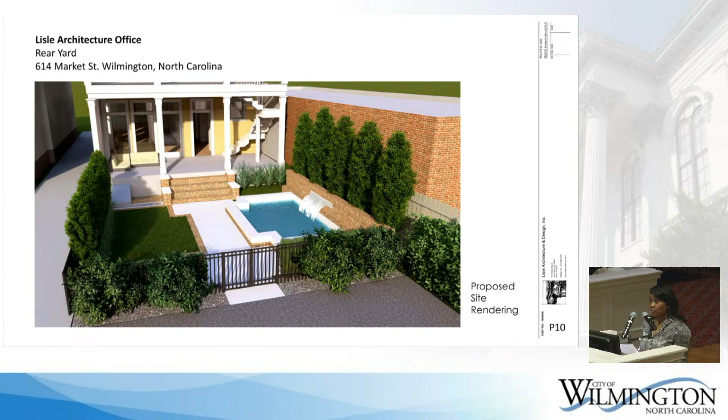The proposal seeks to remove the non-historic parking space from the backyard, add a water feature in its place, and improve the area with new landscaping, a paved walkway, and fencing. The renderings and the presentation represent the design guidelines and also the features in the materials.

The staff report recommends approval based on the following conditions: the waste concrete from the demolished parking lot should be removed from the property for proper disposal; the existing driveway should not be altered in size or material as a result of this project; no mature trees or historic landscaping shall be removed as a result of this project; and the proposed fence height should not exceed 6 feet.

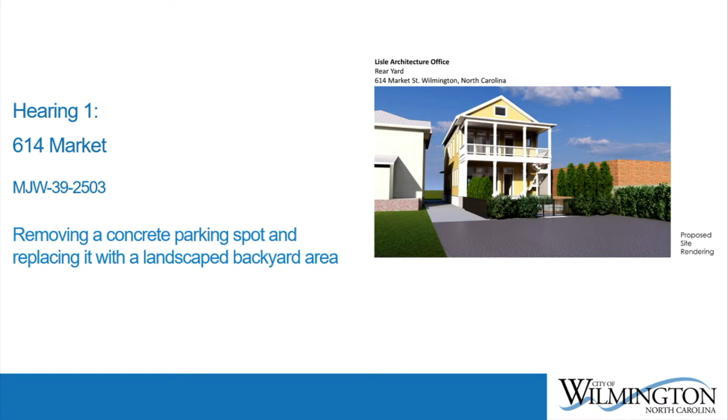Do you have any questions? Is this going to remain an architect's office? Is there any change? It's an architect's office right now. Is it still going to be an office for an architect, or is someone buying it? I'm just curious why they're doing this. I'll let the applicant speak to that. All right, thank you. Any other questions for staff? Thank you.

Could we please hear from the applicant if they're here and available?

Hi, my name is Griffin Lisle. I live at 225 Candlewood Drive. I'm just here to answer any questions you have about 614 Market.

Any questions? Is it going to remain an office? Yes. And is that a swimming pool in the backyard? Or is it a water feature? Water feature, yeah, okay. That's all. Okay, thank you. No problem.

If we can invite any members of the audience to come up and speak in favor or against this item. Have you been sworn in? Okay, come forward and we can do that here. I think you're going to face Ms. Bradshaw over there. Raise your right hand. Is the testimony you're about to give the truth, the whole truth, and nothing but the truth? Thank you.

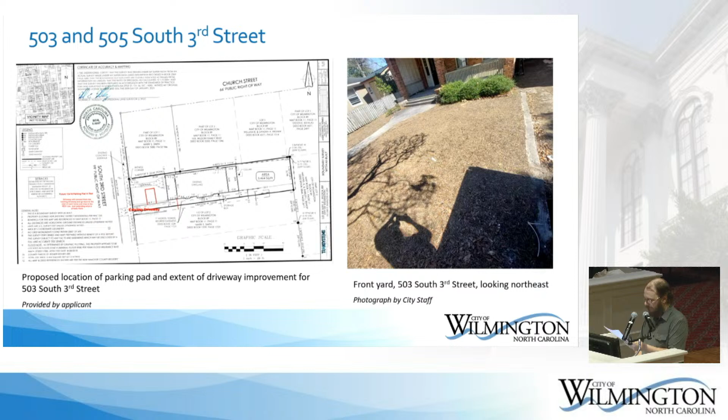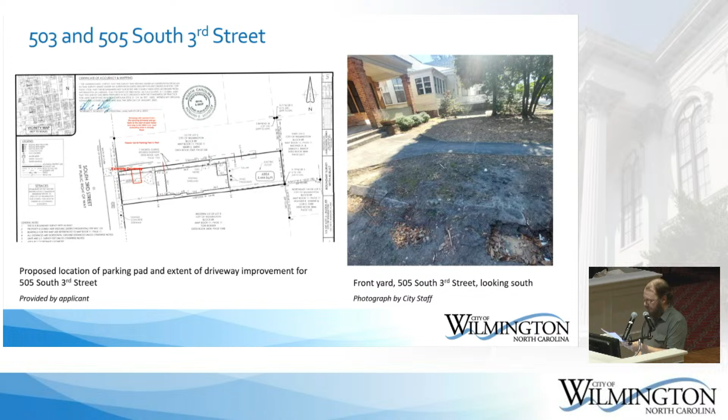The proposed concrete for both the improved driveways and parking pads will be standard concrete mixture and match the existing city sidewalk and concrete walkways already on the property. The existing concrete walkway for 505 South 3rd Street will be incorporated into the proposed parking pad for the property.

The existing driveway is lined by a low masonry curb retaining wall in a varying state of disrepair. While the existing driveway is sunken in comparison to the neighboring yards, the proposed concrete driveway improvement will raise the elevation of the driveway to match the yard, so no major property grading will be required.

The final portion of the proposed project is to repair the damaged brick at the rear of the house of 505 South 3rd Street. The damage, likely caused by subsidence, has resulted in a situation that requires the existing brick wall to be deconstructed and rebuilt.

The existing brick will be salvaged and reused as much as possible, and any required replacement brick will match the existing brick as closely as possible.

Although care will be taken to match the replacement brick and new mortar, the proposed repairs will be highly visible, so to remediate that, the applicant proposes to use a natural lime wash to cover and protect the reconstructed brick wall. A natural lime wash is recommended by the National Park Service for unpainted masonry because the lime wash allows the brick to properly breathe while protecting the brick and giving it a uniform appearance.

If approved, in addition to the standard conditions, staff recommends that the conditions include that the proposed driveway improvement project and parking pads shall be installed with a minimum amount of grading to minimize the alterations to the property's topography, with screening vegetation planned to obscure the view of the proposed parking pads from the public access. Screening vegetation shall be chosen from the city's suggested plant list or approved through the administrative bypass process. No mature trees or historic landscaping shall be removed as a result of the project, and only the brick portion of the rear on 505 South 3rd Street shall be lime washed.

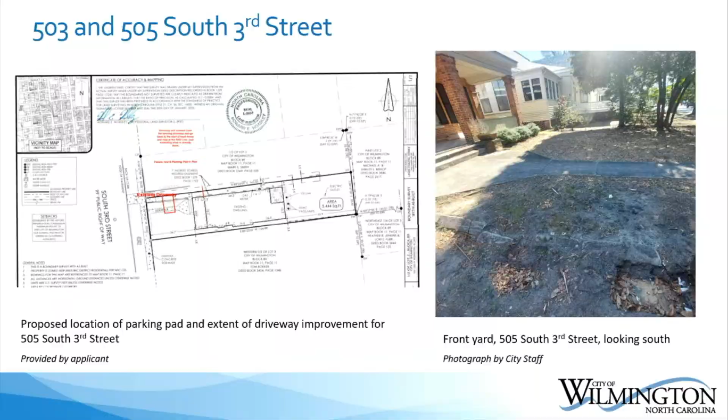The brick repairs will be needed because that back half unfortunately sunk many years ago at some point, which caused that huge crack in the rear. So in order to repair that property properly instead of covering it up, we have to take that section apart and build it back. It's very hard to match those bricks, so you're definitely going to see a difference there. It doesn't look like any of the brick themselves are actually cracked, everything cracked along the mortar joint.

So two-part question: one, could you not save the brick as you cut these out and pull them apart? But more importantly, have you had a structural engineer or someone identify what the issue is to make sure that when you go about doing the repair, it doesn't happen again? Something's happening down below.

Yeah, absolutely. So the other owner on the property, he's the general contractor. He brought his structural engineer in, and structurally the property's sound. It just sunk many, many years ago from when it was originally built.

So I'm arguing against the idea of coating this with anything, I don't think you need to. I think you'd be able to take this apart, stitch it back together, match the mortar, and then you won't have to coat it.

To be bluntly honest, the other part of it is the fact that they're identical twin properties, and we wanted to differentiate them from a selling perspective, because right now they are identical in colors and everything. So that process would differentiate them a little bit so they don't look absolutely identical.

I mean, you could probably be considered for another award if you go about doing this in a way that you gently take the thing apart, grind the joints out, remove the brick, put it all back together, put some wall ties in to bridge that joint where those cracks are, or tuck in some number 3 rebar, remortar with a matching color mortar, type N, and just put it all back together.

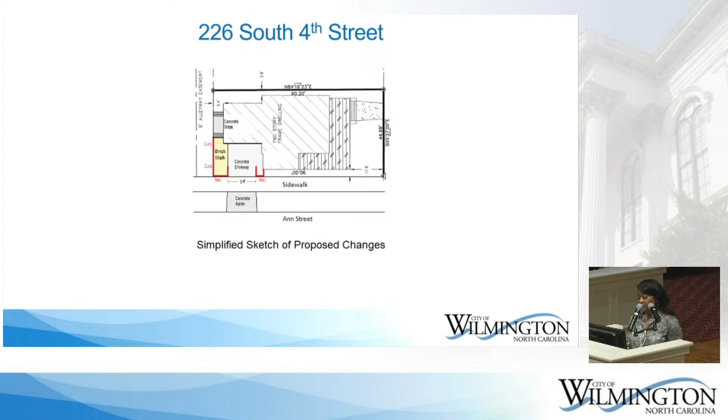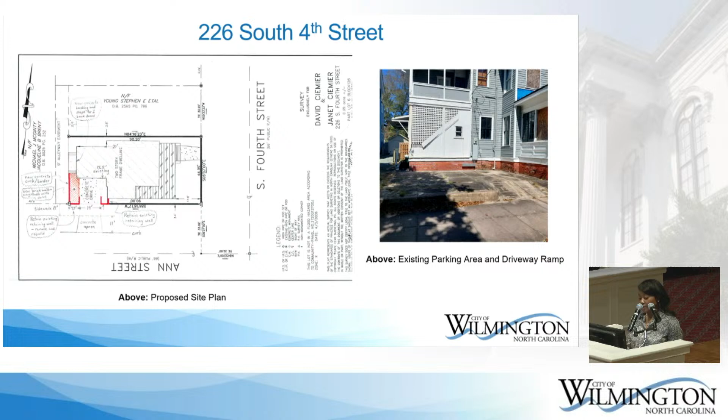The applicant proposes to demolish the existing deteriorated concrete slab driveway and replace it with an expanded driveway to improve its safety and usability; demolish and remove the existing concrete slab surface and construct a new brick walkway alongside the proposed improved driveway; and replace the existing deteriorated wood steps with no landing with new brick-face concrete steps and landing to improve safety and access to the rear entries of the dwelling. If the commission approves this proposal, staff recommends the remaining low concrete retaining wall shall be retained, no portion of the proposed brick walkway or concrete curb or the concrete and brick steps will extend into the neighboring alleyway easement, and no mature trees or historic landscaping shall be removed as a result of the proposed project.

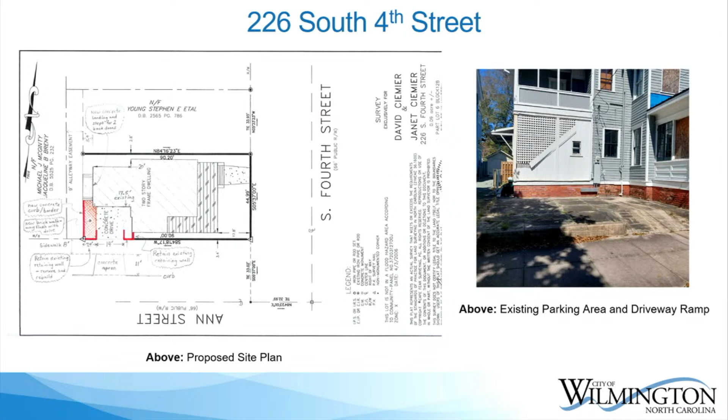Thank you. Do you have any questions? Any questions?

Thank you. Could we hear from the applicant if they're available, please? If you could come forward and state your name and address. Good evening, Dave Ciemier, 226 South 4th.

Any additional information for our consideration, or do you want to just entertain any potential questions from us? Oh, no, Monica covered it. I can just say that...

We looked at various options for this space. It's kind of a dead space if you know the property, and its only usage is a drive. We looked at patio for dining, for gardens, and I think we've got the best solution here. We tried to optimize the width of the driveway to the space, to the walkway, which goes to the back steps, which right now are wood, and there's no landing, and you step out into air. So those need to change.

So it'll clean up the entire space if you've ever walked the sidewalk. I've actually stood over this concrete and sat there and thought about other things to do, and it is a really good plan. It's been a very long time, but it's a great house. This is what concrete looks like when you pour it, and it's getting greater inside too.

In addition to the chain-link fencing, several volunteer trees have taken root along the top of the retaining wall along South Front and Orange Streets. The roots of these trees are causing extensive damage to the brick-clad stone retaining wall, including forcing the brick away from the wall in some areas. This has led to brick collapse. The first step of the project will involve removing these volunteer trees from the retaining walls.

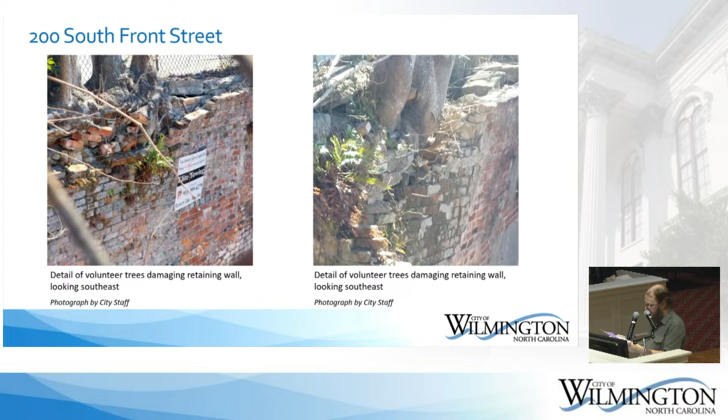Once the trees are removed, the brick cladding will be deconstructed in vertical sections that will be temporarily shored up to minimize the potential effects to the neighboring sidewalks and streets. Any damage to the underlying ballast stone retaining wall will be repaired, and as much of the original brick as possible will be salvaged for reuse, while any replacement brick will be the Cambridge 66 brick replacements.

Once the brick-clad stone walls are rehabilitated, the existing chain-link fencing will be removed and replaced with a black metal palisade-style fence. Samples of the proposed possible replacement brick and the proposed replacement fencing are seen here.

If approved, in addition to the standard conditions, staff recommends that the conditions include that all volunteer trees and shrubs shall be removed to prevent further damage to the restored retaining walls. The exposed brick cladding shall be salvaged and reused to the maximum extent possible. Replacement brick shall match the existing brick as closely as possible. The proposed replacement fence shall be no taller than 6 feet in height, and any required engineering review and right-of-way permitting shall be completed prior to the proposed project being started.

Are there any questions? I love the categorization of volunteer trees. They were not planted on purpose, let's put it that way. They volunteered, I think. Pulled out when they were like 12 inches tall, that would have been a little easier. Huge mistake.

Okay, thank you. Is the applicant available to answer any questions or offer more information? My name is Stephen Honeycutt. I represent the applicant, my wife Terry. I live on 606 Hillview Drive in Wilmington.

First became aware of the property in 2004 when her father had purchased the adjacent building at 208 Front and this vacant lot to service an expansion for his son that was running the Cape Fear Serpentarium at that time. The company I worked for did the architectural design services for that job, so I was taking photographs of this lot in 2004 and saw at that time that the volunteer trees, looking back on it now, were no bigger than my thumb. Missed opportunity.

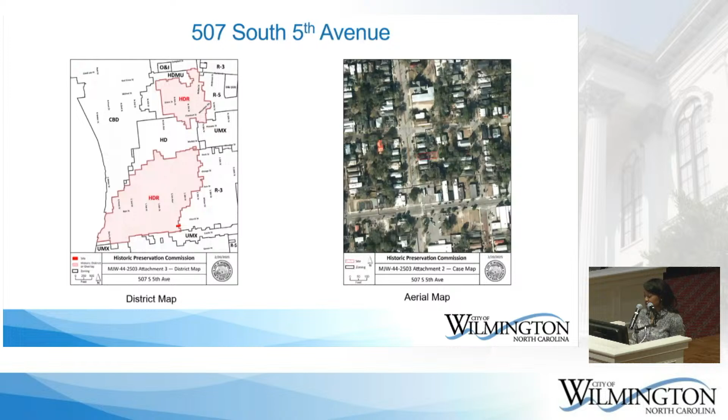An existing severely deteriorated small 1-story porch and wood steps at the rear entry of the house will be removed to make way for this deck.

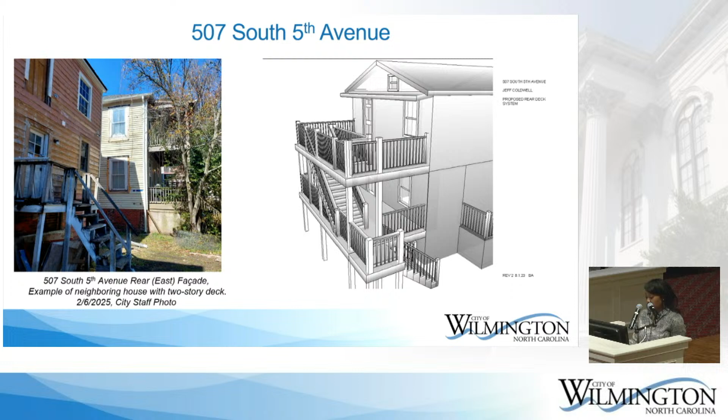You can see here in the image that the neighboring house also has a 2-story wood deck beside it. If the commission elects to approve this proposal, staff recommends the proposed 2-story deck shall not be constructed beyond or above the east rear elevation of the dwelling to minimize its potential view from the public right-of-way, and no mature trees or restored landscaping shall be removed as a result of this proposed project.

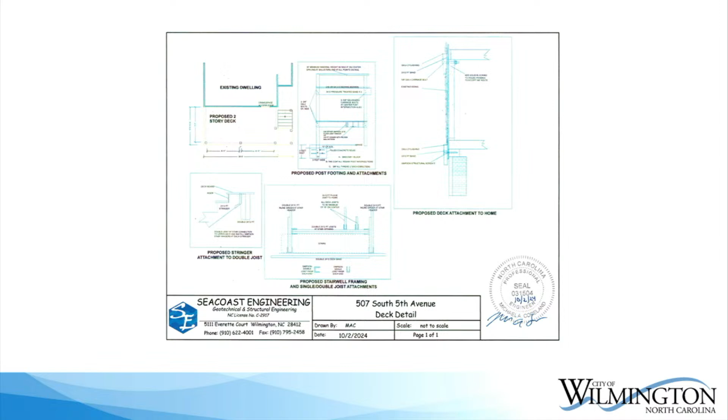And I know the applicant couldn't be here tonight due to work conflict. Okay, have any questions for me? Nope, thank you.

Okay, with the applicant not available, would anyone like to come forward to speak in favor of this item or against the item? Seeing none. Commissioner deliberation, thoughts? No problem.

Now remember, this is the guy with the roof and all that. I think he's trying to restore this house, so yeah, and that back is a disaster. Ugh.

Don't really want to second guess this designer too much, but they're putting half of the weight of this deck onto the house, onto the existing really old house with a really old foundation, footing, if there's one at all. Good point. Typically what you do with something like this is you have another girder just maybe a foot outside of whatever footing may be there, so you're basically cantilevering the deck over.

Is that us or is that building code? I mean, it's not building code because the engineer has a seal on it, and that's basically as good as code most of the time, but it just seems odd.

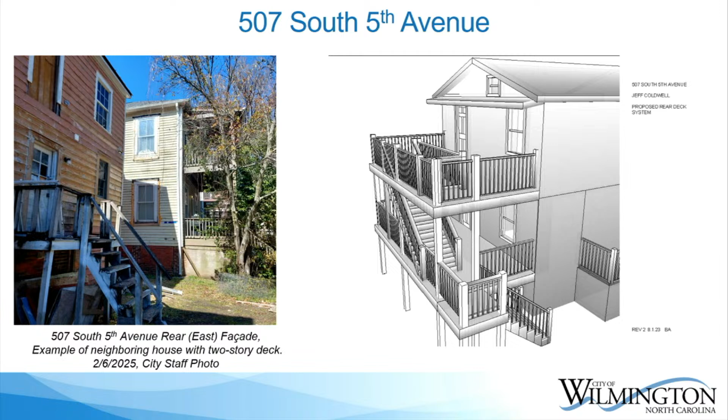But if there are two apartments, it's even less of a reason to have a connecting deck in the back. Your neighbor that you don't get along with all of a sudden has access to your space. It's just a couple weird things about it, but without the applicant here, it's really hard to get an answer on some of these things or ask for a little bit of change.

I agree, I think they're wasting their money because they're trying to put a deck on something you're not going to be able to enjoy. It's got a stair in front of it, stairs outside of the deck.

Should we continue this till next month, see if the applicant can make it? That would be my suggestion, just to understand some of this and not bear this burden on the existing structure.

Just go ahead and put in another girder. It shouldn't really add any significant amount of money. And there's the possibility of taking out the stairs, and figuring out why the stairs are there in the first place.

Not pretty. Sentiment right now, based on what they submitted, sounds like we would deny it. Is it better for us to continue it, or is it better to deny it so they'd have a chance to go back? Because if we're just continuing it to deny it, I don't want to hold them back further. Does that make sense?

Can staff kind of point out what we're talking about here tonight? Hint, hint—do a similar redesign as cases 2 and 3. Okay.

Is there any way they could get our feedback from this with the continuance to make adjustments? Yes, I can reach out to the applicant and tell them about the adjustments. Chris, you're saying a girder?

Could they not put posts against the house? Yeah, in the back, definitely posts against the house with another girder across there. Okay, then that's what you're kind of talking about. That's why I wanted to make sure it's bearing.

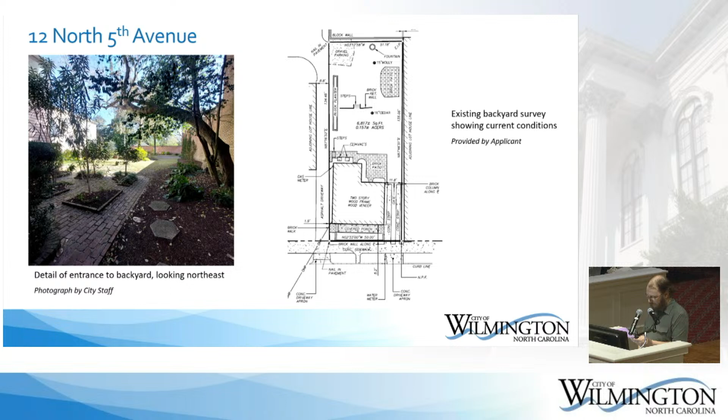The existing backyard landscaping features brick patios, a concrete block planter, mature trees in a variety of conditions, shrubs, and other ornamental plantings.

The proposed project to extend the gravel drive into the backyard will lead to graveled parking areas. While the initial project submission proposed 2,000 square feet of parking areas in the center plan, because of the arborist's recommendations the applicant has revised the project plan and is now proposing 3,200 square feet of gravel parking areas, which is the plan on the right.

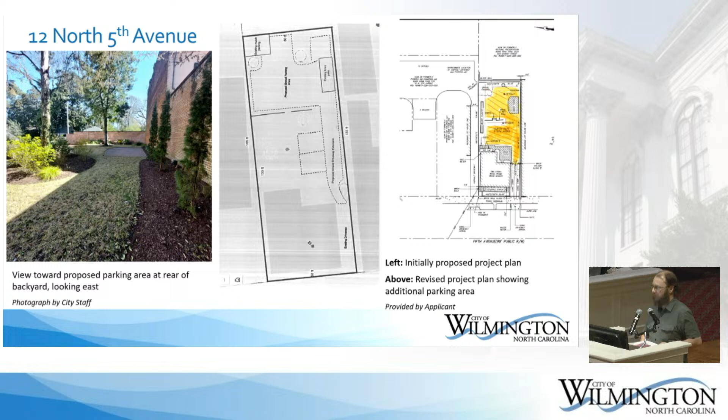I'm sorry, can you back up? Let me see, okay. So you're saying they're increasing the size? Yeah, correct, they are expanding out. The applicant is here to speak on the project as well, so they can answer questions too.

These are the areas where the proposed gravel parking areas will be located.

Portions of the existing landscape will be retained and preserved, including a low brick wall and steps on the north side of the backyard and a landscaped island in the middle of the backyard, although the arborist report recommends removal of the eastern red cedar at the center of this landscape island because the tree has been weakened by an earlier stem failure.

If approved, in addition to the standard conditions, staff recommends that the proposed driveway extension and parking areas shall be gravel with no concrete or blacktop to be used. The proposed driveway extension and parking areas shall not access the existing paved parking lot at the rear of 18 North Fifth Avenue without a formal right-of-way easement being established between the two property owners.

The low brick landscaping wall located on the north side of the property in the backyard shall be preserved and not impacted by the proposed project. And the arborist report from Bartlett Tree Experts, dated February 20th, 2025, shall be followed to address the issues with mature trees in the backyard.

Are there any questions? So when it says to follow the arborist recommendation, I circled that in the application—is it the elm that's kind of open-ended, that they're not sure if it's... I visited the site, where other things also need to be removed, like clearance of vines to see the condition of the underlying tree.

So not necessarily taking it down, just removing the vines, is that right? On one of the trees, the cantilevered elm—yeah, I do believe that's a cantilevered elm that they say is overextended and needs to be pruned. And the small cluster is the cherry laurel, I believe.

So the elm is the one that has this curve to it on the right? Yeah, in the string curve. So they park in the back now, in the gravel parking?

No, there is no parking there currently. There is a driveway—just a strip concrete driveway—that ends at the iron gate. It's landscaped backyard at the present time.

In the back, when you go all the way to the rear on the left side of the yard, there is a little gravel area—it says gravel parking back there. That has grass growing on it now.

And it's accessed from the parking lot on 18 North, so the driveway on the north side of the house—they have no legal right to it. That belongs to the other property. You would have to double check with the applicant, but that's my understanding.

Just trying to get a better understanding. There's no easement to get from one property to the other, as far as I understand. Well, why would they have a gravel parking area if there's no easement? People could have been parking on it without one, I'd guess. Just the way it was.

So there's no way to get in there across their property? That's right, exactly. This property recently sold or is selling, so I'm guessing somebody looked at a survey and said, oops—we need to talk to the applicant. The applicant is the person who bought it, the recent purchaser. Okay, got it.

Okay, anything else? All set, thank you. Would the applicant be able to come forward to add anything or take any questions?

Hey, good evening. My name is James C. I'm an attorney, and I'm the applicant here. I practice law with my father, Jim C., who's here with me today.

What we're looking to purchase this building for, we haven't purchased it yet, is to run our law office out of it. So that's what all this is coming from. It's a very nice building, but we couldn't use it as a law office without sufficient parking there.

This building and the one next door used to be all one law office, Marcus and Taylor, and they owned all of this property. They put that gravel parking lot in there when they owned it all, and an easement wasn't really a concern for them because they owned it all at the time. But they sold it in 2019, and there is no easement to get to the rear alley on the north side of the property. There's no way to get to the rear at all without an access easement.

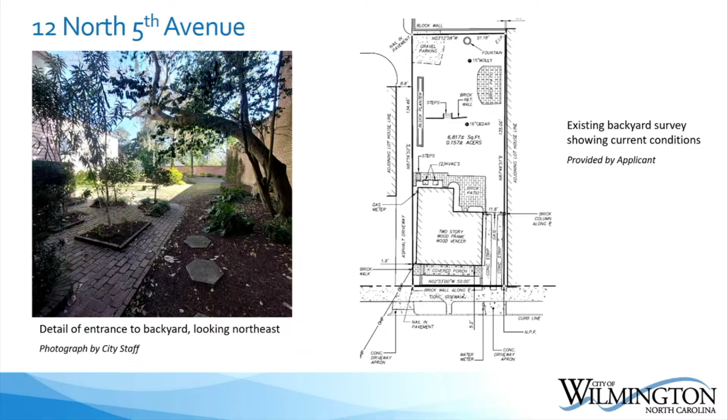Ben did a very good job explaining the situation, and I'm happy to address any other questions you guys may have.

Are you getting an easement? We're in discussions, nothing's finalized with that. My hope would be that if we got an easement, it would not be 100% necessary to use because you'd have this alternative route, and the easement might just smooth the traffic flow through there. We're exploring with Marcus and Taylor maybe having overflow parking for us and for them and a shared kind of parking situation, but we don't really have anything firm.

But again, my preference would be this could stand on its own, and the easement would just be something nice and extra. The iron gates, they're going to remain, and you're not going to put electric arms on them or anything like that. You'll just open them during the day and close them at night, something along those lines? That's correct. I like the iron gates there as additional security.

I don't know if there's any kind of historical feature to them. They don't seem to exactly match the house, but they're going to stay, hinged the way they are. You'll just keep those open during the day and closed at night. Is there enough room for a vehicle? It's a tight fit, a smaller vehicle. It's, I believe, 7.5 feet wide. An F-150 is about 7 feet wide, so if you wanted to drive a big truck through there, it's going to be a very tight fit.

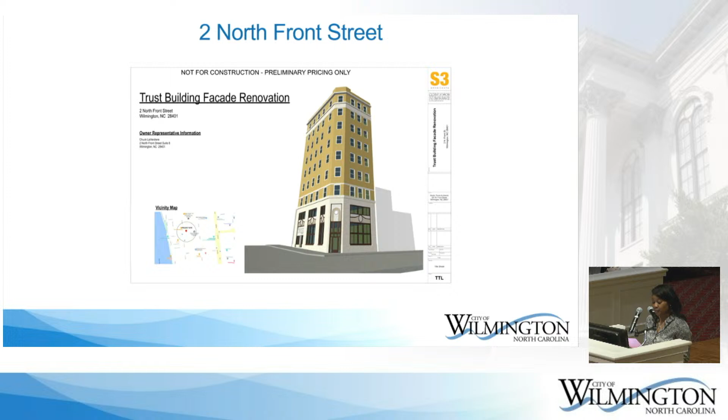The applicant proposes to remove all existing contemporary stucco panels, single pane site-built windows, aluminum doors, and contemporary exterior casework from the storefronts on the first story of the building, and restore the west, southwest, and south elevation storefronts with period-appropriate design and materials. This includes installing new double-pane glazing with Marvin Ultimate Wood picture windows on the west and south elevations between the lower rows of the wood windows.

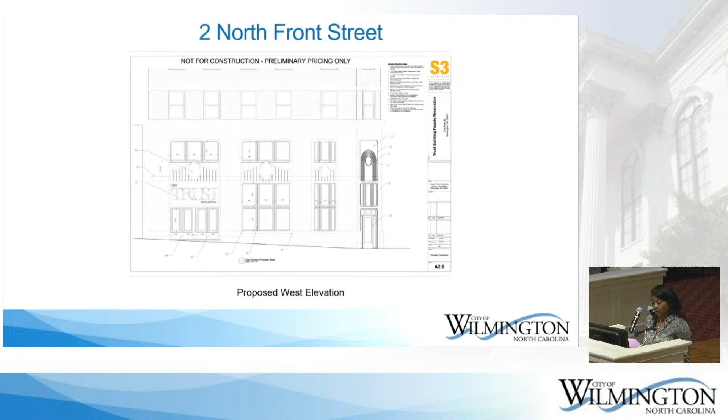Install panels of painted ultra-high density urethane, cut and shaped from single blocks with a CNC router machine, on the west and south elevations between the upper and lower rows of the wood windows. Remove the stucco of the entry door surround, the stucco panel above, the small contemporary clock, and the rectangular windows above the clock on the angled southwest corner of the building. Install a new wood storefront with a CNC-shaped panel featuring a larger clock by Emerald Clock with Roman numerals and half-minute dials. This clock feature will resemble the original clock of the original building.

On the west elevation, install a new wood door entrance to the elevator lobby and install a panel that presents the name of the building toward North Front Street. If the commission elects to approve this proposal, staff recommends the proposed storefront alterations shall match the details as seen in the historic picture of the building, and the proposed replacement windows and doors shall be low-E with no tint. Do you have any questions?

Any questions for staff? No? Thank you, Monica. Thank you.

Would the applicant like to come forward and answer questions or explain further?

Please present your name and address. Yes, good evening. My name is Chuck Laverdier. I am the owner of the 8th floor of the building. I'm the president of the Owners Association. I also run my business out of the building there.

Do you have anything to add to the application? Nope, that covered it. Okay, does anybody have any questions for the applicant?

The current look of the building - was there any picture anywhere of what this building originally looked like when it was constructed? So there were some renderings from back then, and those are included in our application. Can I go through this? The very end of our application had a few photos for reference.

That's it? Okay, they're included in our application, and they were in the supporting documents for the meeting. They are pages 41 and...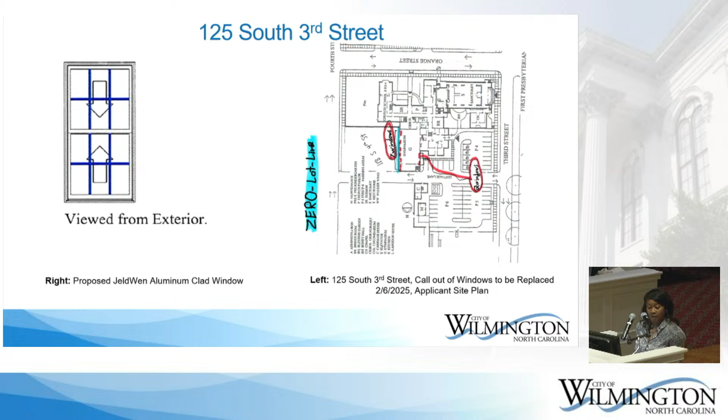Any questions for staff? No, thank you. Is the applicant available to add anything or answer any questions we may have?

You can state your name and address, please. Good evening, Nick Goody, 125 South 3rd Street. The only thing that I have to add is maintenance on the east side.

With that 0 lot line, that's kind of a portion that leads us to want the aluminum clad windows. Less maintenance on that side on the 0 lot line would be preferable. In the past, there has been less than perfect cooperation from the neighbor, and I don't believe there's been an easement or anything towards maintaining those wooden windows, original to 1928 believed. But most of that's probably deferred maintenance as well, admittedly.

Yeah, okay. Anything else, Tad? I'm just personally curious about one thing.

These gymnasium windows are in a state of disrepair currently, with vines growing through them, potentially allowing animals, birds, or water in. That's something I would love to address among many other aspects of our property in the future. When I was looking at these windows, I saw them and thought, not good, but okay.